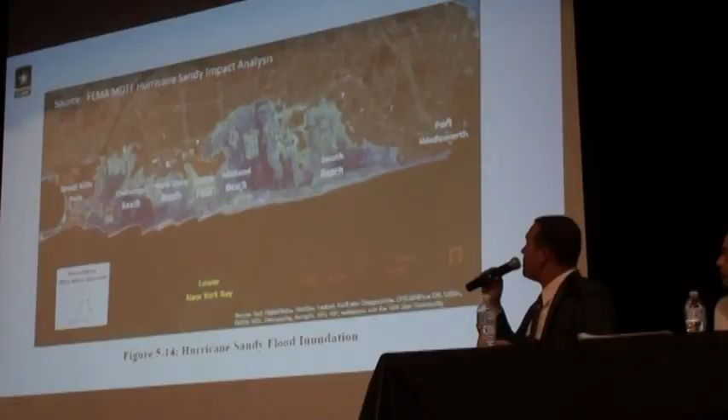Mr. Borough President. Thank you, Congressman. My name is Anthony Ciorra. I'm the Hurricane Sandy Recovery Program Manager for the Army Corps of Engineers New York District. And on behalf of our District Commander, Colonel Thomas Asbury, I would like to thank the Congressman and the Borough President. Again, that's the inundation map for this area from Hurricane Sandy.

You can see how widespread the flooding and damages were. So, talking about construction, all of the approvals that are necessary are in place. The Congressman mentioned the final hurdle that was enacted through legislation earlier this calendar year. The feasibility report was approved by the Secretary of the Army back in December 2016. I mentioned the federal cost share funds that are available under the Disaster Relief Appropriations Act, Public Law 113-2.

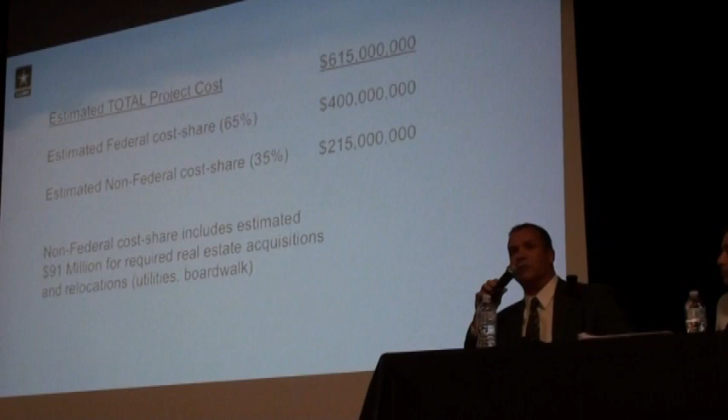The initial construction is cost shared, 35% with the non-federal partners at the state and city of New York. Those funds are also appropriated and in place. So all of the funding needed to build this $615 million project is available, and we are ready to proceed. We'll get to that. So, estimated total project cost, $615 million. Again, $400 million federal, $215 million non-federal, and that non-federal share includes $91 million in estimated real estate acquisitions, which the city will be performing in order to get the project constructed.

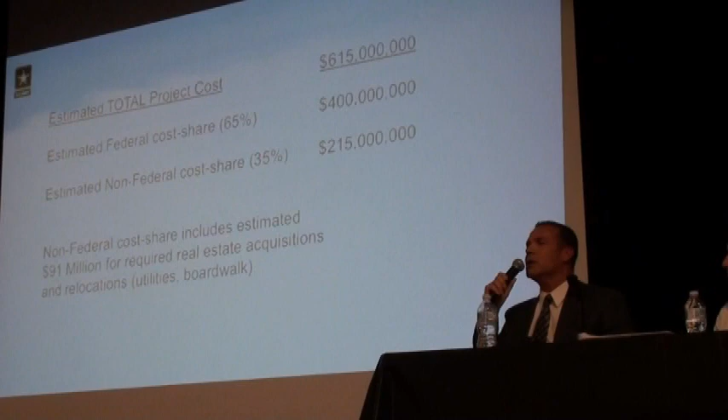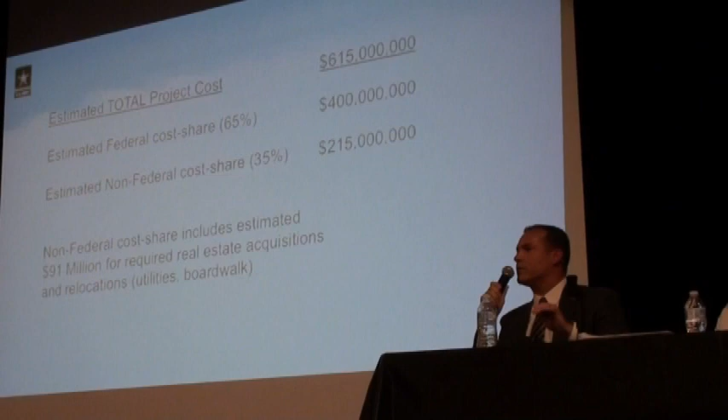There were times when we received no funding and had to stop work for a year or more and then pick it up again. I'm happy to announce that those days are behind us. We have all the funding needed to move to construction, and we're here today to tell you about what you can expect as far as the schedule, when we expect to start, and the best information we have available to you this evening. And with that, I'm going to turn it over to the project manager, Frank Verba.

All right, thank you. So what we'll do today is we'll kind of go through how we foresee breaking out the construction of the project. But just a kind of quick summary again. Once the report was approved in 2016, that allowed us to actually start the plans and specifications, the design phase for the project in 2017. And as Anthony said, we did sign the project partnership agreement, binding the project moving forward in February of this year between the Corps, the state, and the city of New York.

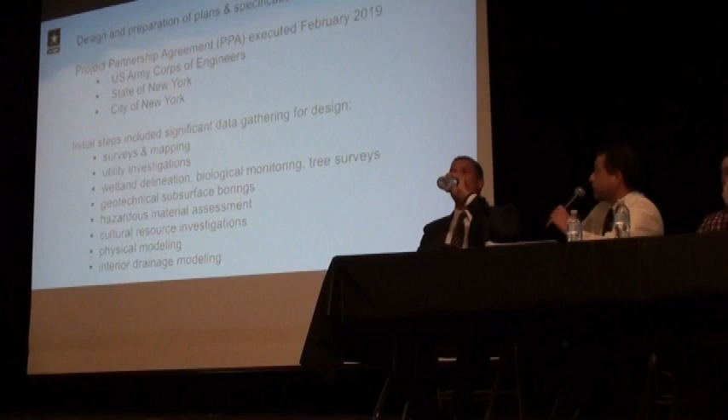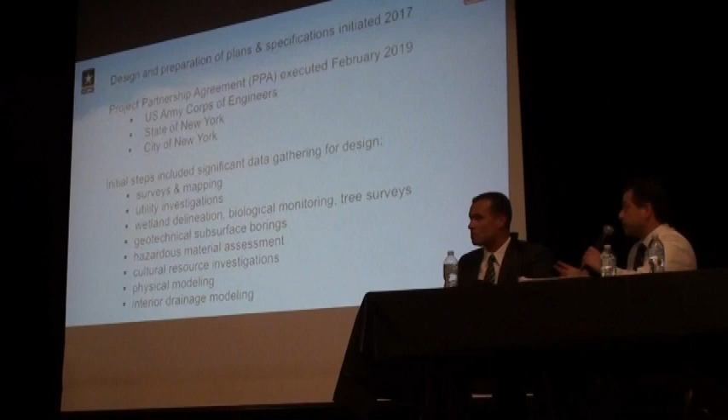Now, over these last 2 years, there's been a lot of work that's been going on behind the scenes, a lot of engineering and environmental work necessary to get the data that you need to actually get the construction contracts set up. And here's a listing of all the items that we've been doing: surveys and mapping, utility investigations, all the environmental wetland delineations, biological monitoring, tree surveys. We've been out in the field doing geotechnical subsurface borings, hazardous material assessments, as well as cultural resource investigations.

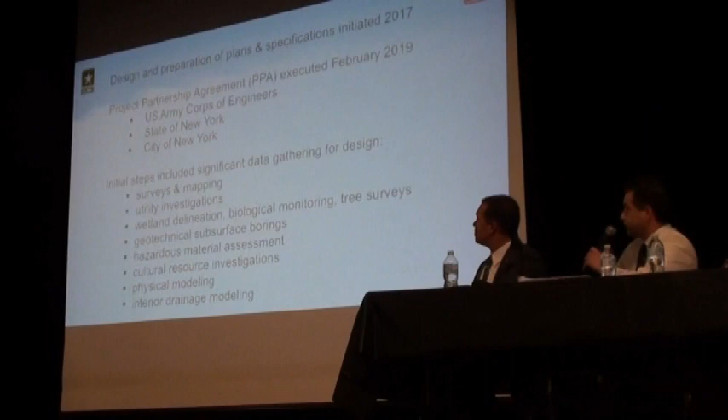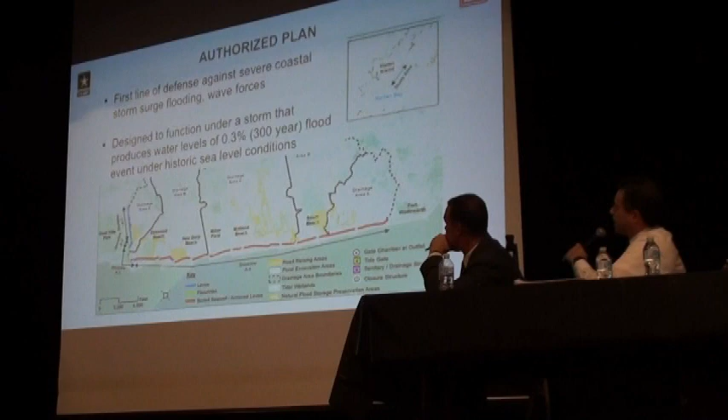Physical models were actually completed, trying to maximize the design, minimize the amount of overtopping, the amount of ocean water that can get over this project once it is constructed. All right, so obviously we do have an authorized plan, and the goal here is this is going to be your first line of defense against the severe coastal storm surge flooding event. It's basically designed at the heights that we're constructing to an approximate 300-year flood event, which actually is a little bit larger than what happened during Sandy. What is the height?

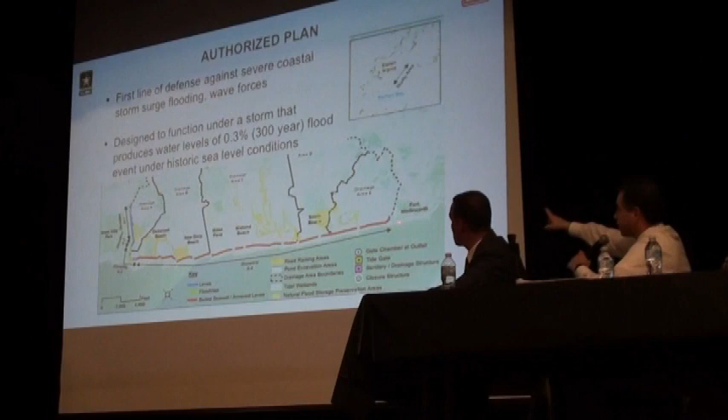We'll get to that. So, following the generic lineup of the project, you can see following the coastline from Fort Wadsworth, all the way through Miller Field, through New Dorp, all the way into Oakwood is going to be the buried seawall structure, large rock structure that'll basically give you that protection from the ocean.

At the Oakwood Beach treatment plant, we have a flood wall which will transition around the perimeter of that area, and then a levee structure which runs inland up towards Hylan Boulevard. That gives you that solid barrier against the ocean storm surge. On the interior, we have natural storage and excavated ponds. Those areas will be able to hold water during an event and basically be able to relieve water once the event is passed. So go to the next slide.

So while we're doing all this design effort, what we wanted to do, specifically on the interior areas, focusing on South Beach, New Creek, and Oakwood Beach, in the open areas where we're going to do natural storage and excavation for the ponding areas, we are starting a site preparation activity for Phragmites control. Some people may be familiar with this because the city has been doing this in some of these areas as well. The objective here is to basically cut down, start mowing those large Phragmites weeds that grow out there.

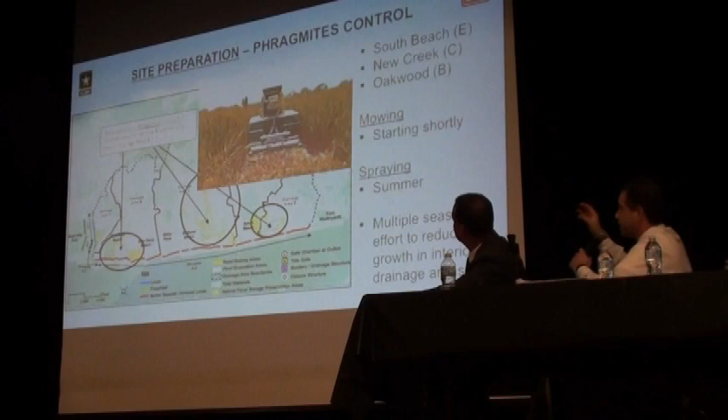With spraying in the summer, there'll be multiple seasons, and the objective here is to start getting that growth out of the way so that when the construction events actually start happening, it'll be a lot clearer to complete the construction. The new plantings that we'll be putting into the area will have a better chance of survival. So this is going to be the first field work that everybody sees. We expect to start in the next couple of weeks in December. Obviously the weather will have a play on this, but the goal again will be through South Beach, New Creek, Oakwood, getting rid of all that Phragmites, multiple seasons.

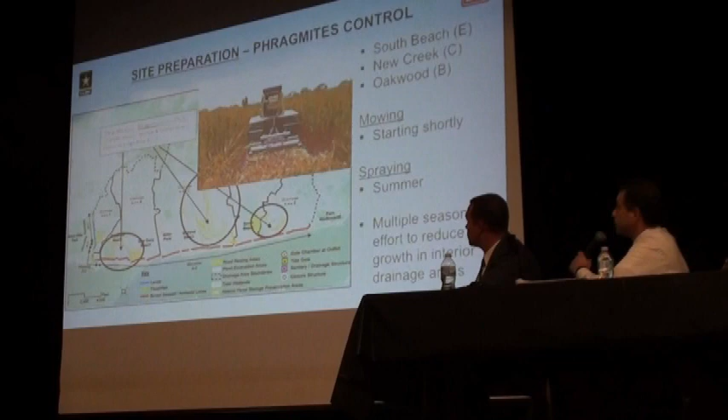Next slide. So now we'll go through how we're going to break out the actual construction of the project. A project this size cannot be constructed all at once. It has to be broken out into different construction contracts. And the objective is we tried to set this up so that individual contracts would have space for contractors' actual work, while other contractors would have room on their portion of the project as well. So first contract, if you go to South Beach, this is what we call Interior Drainage Area E. That should be the first contract for the project, and we're looking to start late next year in 2020. Next slide.

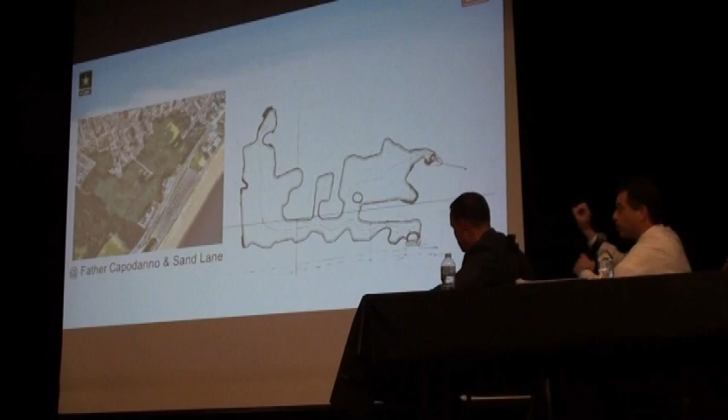So the area that it bounds is, I think people are familiar, Father Capodanno and the Sand Lane area, that open plot of property. The objective here is to basically create a ponding open storage area for interior drainage. Next slide. Here you can see schematically what the area will look like. We'll take that open space, create that new grading to hold the storage. It'll be an excavated pond, roughly 30 plus acres. You'll be excavating about 100,000 cubic yards.

The goal here is this ponding area will be dry on a regular basis. It'll basically be able to hold water during large stormwater events. Once those events pass, that water will drain out. So more often than not, this will be a dry area. The ponding will include two drainage structures that'll tie into the existing Sand Lane outfall, which already gets water out from the interior into the ocean. There'll also be another connection into the Quintard Street outfall.

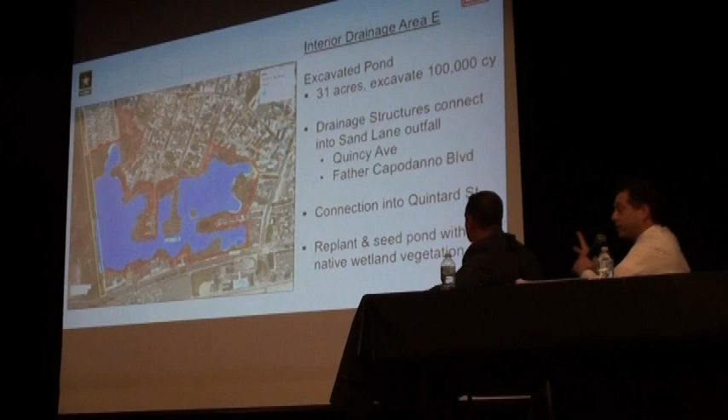Once we have the excavated pond, the entire area is going to be replanted and reseeded with native wetland vegetation. And that goes back to what we're trying to do: get rid of the Phragmites, get the excavation going, and then replant with new wetland vegetation. The next slide gives you a close-up of where the interior inlets are going to be for the drainage structure, one running down under Quincy to tie into Sand Lane, and one running under Father Capodanno, same thing, connecting into Sand Lane. So that was the first contract, late 2020, Interior Drainage Area E in South Beach, that natural storage.

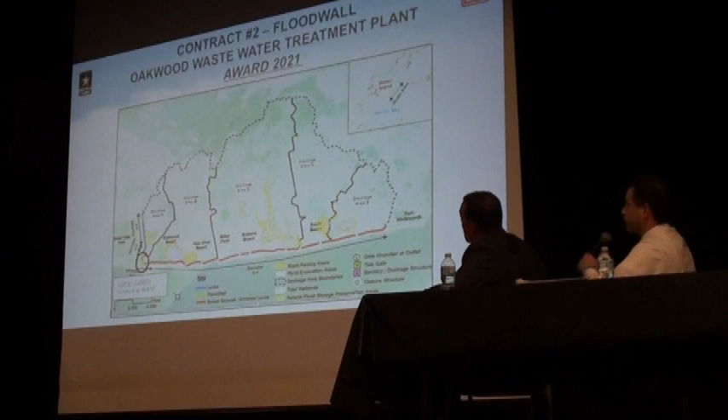Contract 2, if you swing all the way out to Oakwood Beach at the wastewater treatment plant. This is a contract that we're looking to award in 2021. Next slide. So this is where the structure has to basically run the perimeter of the already existing treatment plant. The plan here is to use a concrete flood wall section for this. Next slide. It's about 1,800 feet. It'll basically go around the perimeter of the treatment plant.

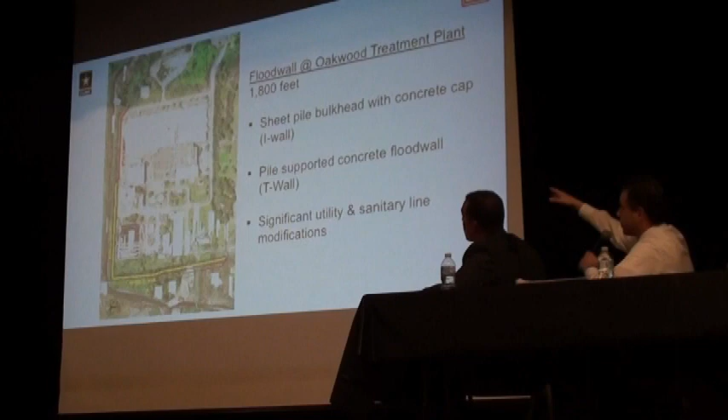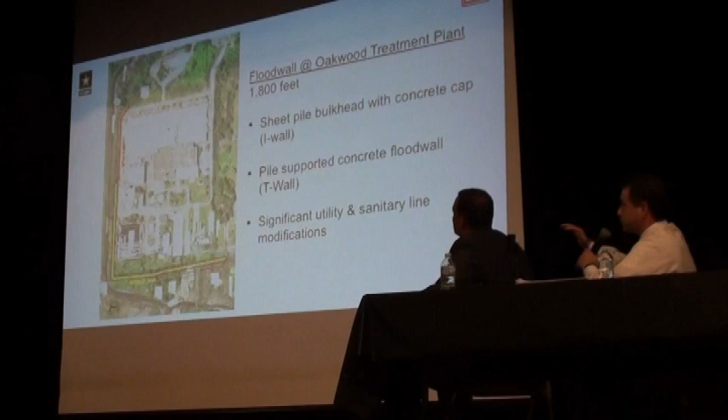It's mostly a pile-supported concrete flood wall that'll run the coastline and up the creek area. And then as you reach the more northern part, it'll be a sheet pile bulkhead with concrete cap. Important to note here is obviously you're at the treatment plant. There's significant utility and sanitary lines that run in the area. So a lot of our effort right now is making sure we understand where all these pipes are, because they all have to be accounted for in the project.

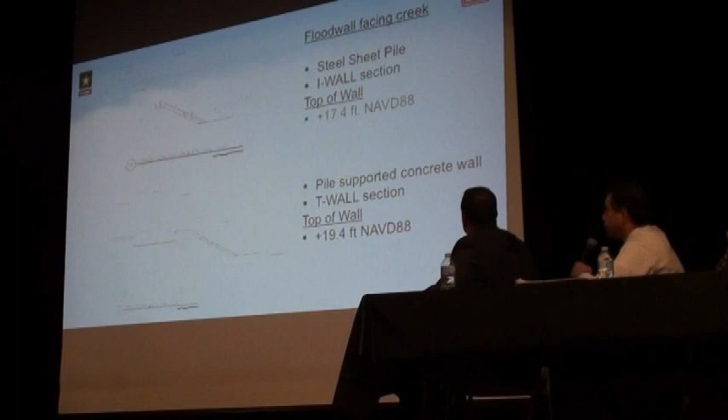Next slide. All right, again, just generic schematics of what the flood wall would look like. There are sections of the flood wall which will be facing the creek. Again, one section is a steel sheet pile, elevation plus 17.4 NAVD 88. Roughly, this wall will range. The terrain in this area is up and down, so you could get heights of 12 feet. You can get heights where it already runs very close to the ground. It just depends on where you are.

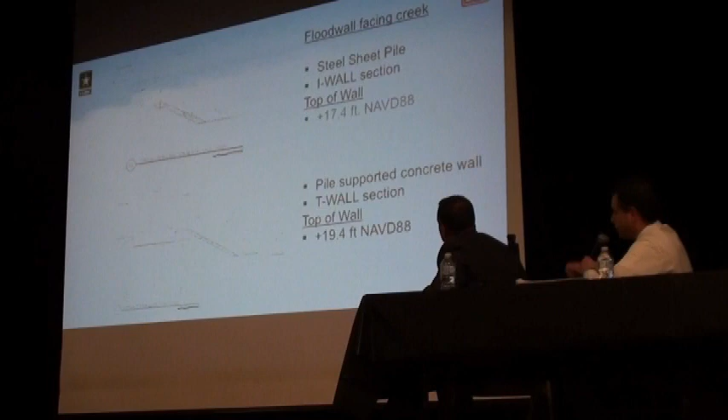As you move closer towards the ocean, you get the pile-supported concrete wall, and you can see the elevation jumps to plus 19.4. Next slide. And then facing the ocean, you get the same structure, the pile-supported concrete wall at elevation 19.4. Again, roughly in this area, on average, it's going to look like a 10 to 12 foot structure.

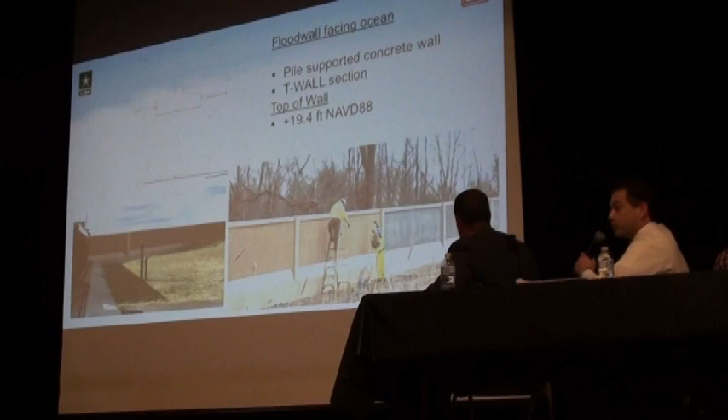Some of these pictures below, you can see these are actual photos from another project. This is the Port Monmouth, New Jersey project flood wall. I kind of chose these because it does give you a feel for what the structure will look like. It also shows that you can provide texture to the wall to make it a little more aesthetic. You can pick colors that can blend into the area a lot better. So it gives you a good example of what this flood wall will look like. But again, this will be just the structure strictly around the boundary of the treatment plant.

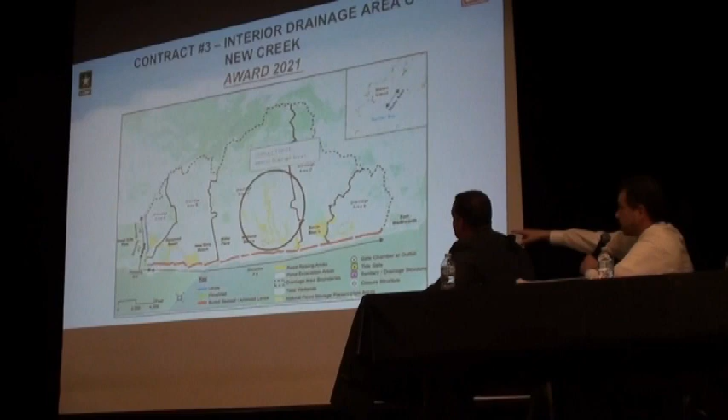All right, so we started in South Beach with the interior ponding. We went to Oakwood Beach with the flood wall around the treatment plant. Now you move back to the middle into the New Creek area. Again, this is another contract that we're looking to award in 2021. Next slide. All right, this is the New Creek area. I think people should be familiar with this. This, again, is open space. We're looking to create ponding and storage in this area. This is basically the area that runs from Hylan Boulevard all the way down to Father Capodanno.

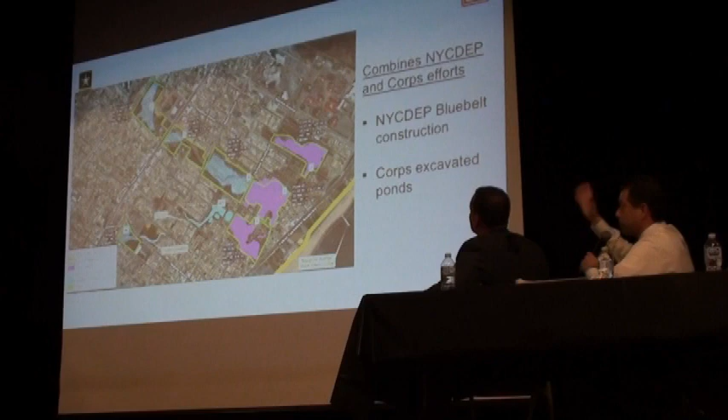Now, this is an interesting case because we actually have multiple efforts going on at the same time. The City of New York is currently in construction and has plans to continue construction for the Bluebelt portions of the project. So what we've done here is we've coordinated with the city. They will continue their portions of the construction, and we will take care of the remaining ponds. At the end of the day, we'll all meet and basically all ponds will be used for the project. So if you go to the next slide.

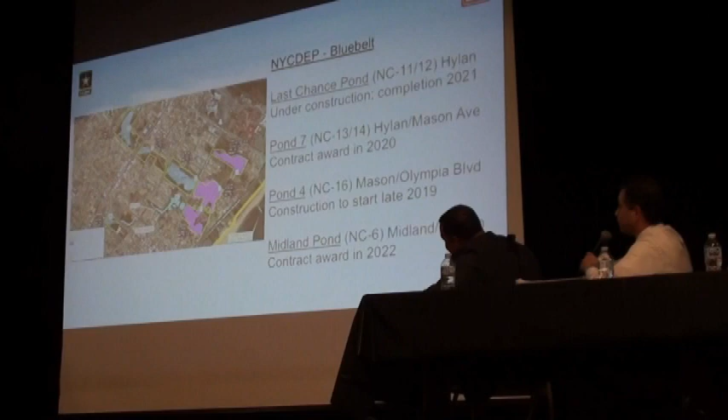For the city's portion of the Bluebelt, it's the top portions that you see in the gray. Last Chance Pond, that's already under construction, and I know they're aiming for completion in 2021. Moving down, Pond 7, between Hylan and Mason, that contract is going to come online in 2020. Pond 4, Mason and Olympia Boulevard, they're actually expecting to start construction by the end of this year. And then Midland Pond, the area of Midland and Lincoln, that would come online in 2022. So again, the city will continue with their efforts and continue to drive those portions of the ponds towards construction.

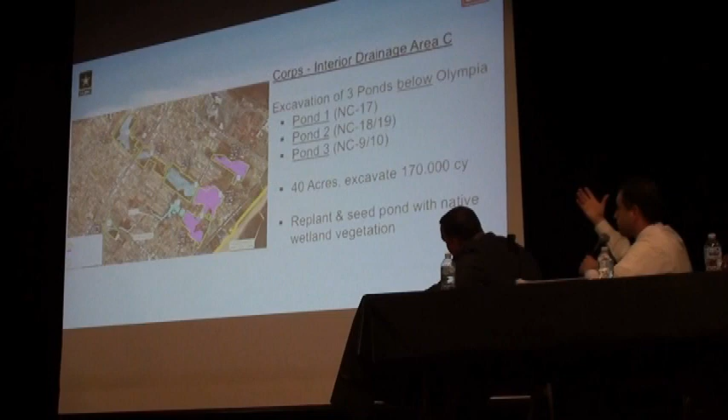Next slide. The bottom three in pink, those are all the ponds that are below Olympia Boulevard, will be the ones that the Corps will construct. We call them ponds 1, 2, 3. Again, a rough approximation, they're about 40 acres. We'll be excavating about 170,000 cubic yards. Same concept as Area E: dry on a regular basis, but able to store water during high-level events. This will be an area where we're trying to get rid of the Phragmites growth, and once we get the excavation completed, we'll be replanting and reseeding with native wetland vegetation.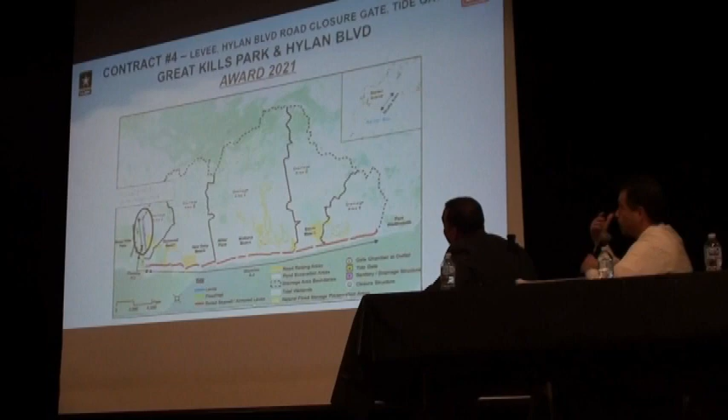But this fourth contract, now basically from the top of the wastewater treatment plant, where the flood wall contract ended, we'll begin the levee structure that will run parallel to Great Kills Park and run up into Hylan Boulevard. And there'll be a road closure gate on Hylan Boulevard as well as a tide gate. And we'll see some of the details here.

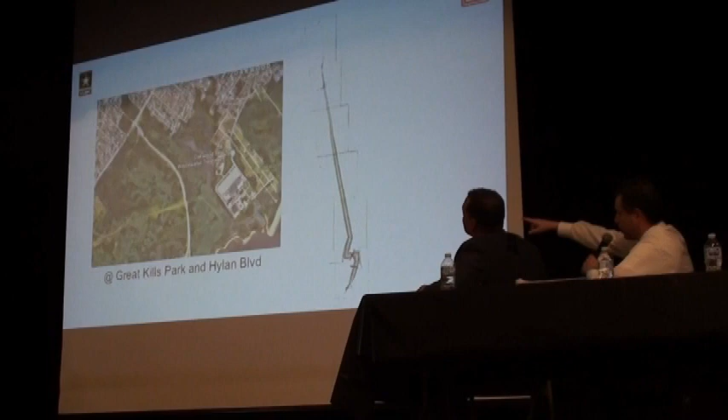All right, so basically that's the aerial, and like we talked about, the flood wall will go around the perimeter of the treatment plant. From that point on, we will construct a levee that'll work its way up, basically following the edge of the Great Kills Park. Let's go to the next slide. All right, this is just kind of turned over, you get the feel.

You see the green is where at the treatment plant the flood wall would end. The levee structure then starts at that point. It's in the blue. Levee structure is basically earthen levee, compacted. That structure will have to cross the existing creek. A tide gate will be constructed there. Behind that tide gate, that open area, which we call interior drainage area A, this is a little different. This area will not be excavated. It'll just stay as open space.

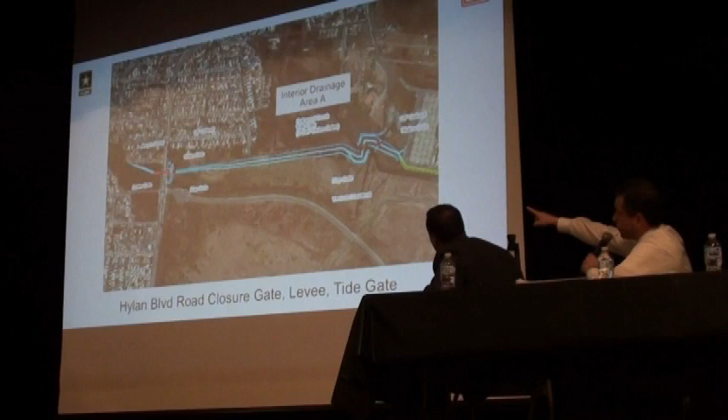Then the levee continues all the way towards Hylan Boulevard. Now to tie off into high ground, you need to get across Hylan Boulevard, so that's why we have come up with the roller gate that will need to be installed on Hylan. If you go to the next slide.

All right, so just quick summary. Again, levee from Hylan Boulevard down to the treatment plant. It's about 3,400 feet, earthen levee. It ties into the flood wall contract. It will have an access ramp so you'll be able to do operation and maintenance. You'll be able to access that and get down to the tide gate and the other structures that are on it. The tide gate is on Oakwood Creek.

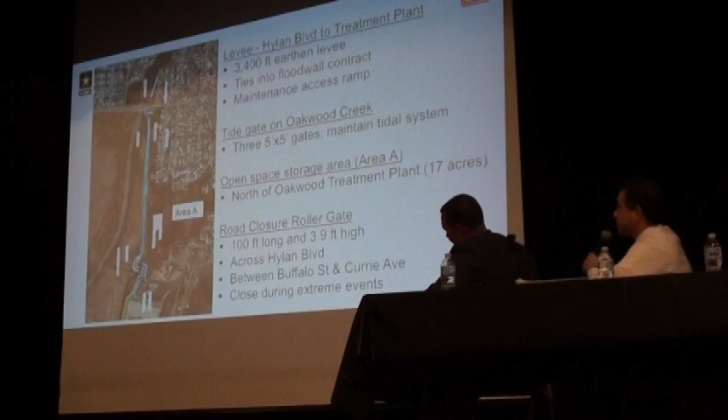And again, the objective there is to just maintain the existing tidal system. So again, it'll be open on a regular basis. During events, it would close and basically act as that barrier. We talked about the open storage that's behind it. It's just going to be open space. It's about 17 acres. And then the roller closure gate.

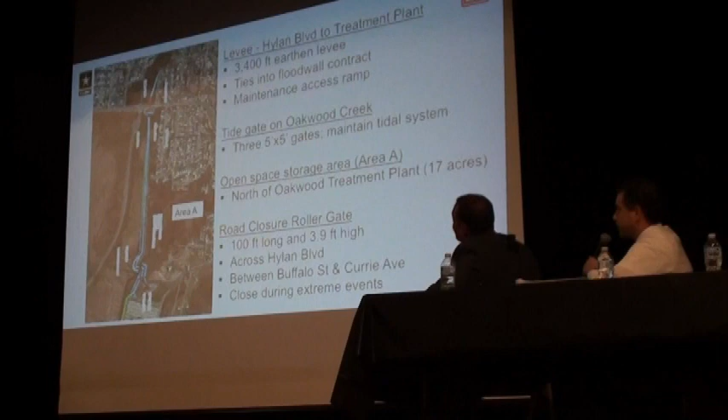Again, you need to cross Hylan Boulevard to basically get to the high ground on the other side. So the construction will consist of a 100-foot long roller gate structure. It will appear about 4 foot high when you're standing on the street. It will cross Hylan Boulevard, basically between Buffalo Street and Currie Avenue.

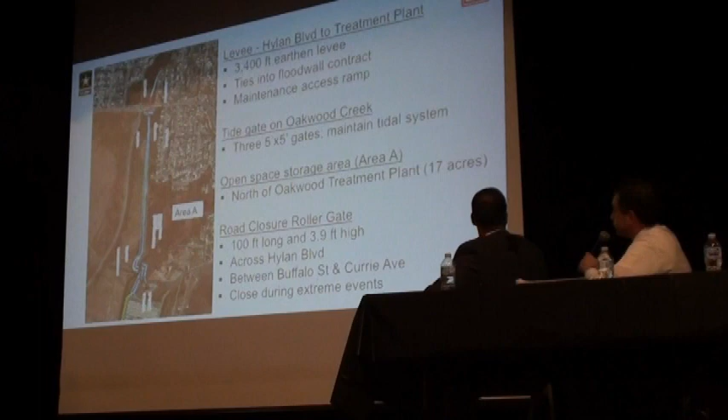It'll always be an open gate. Only during large storm events would it need to be closed. And it needs to be closed because obviously that is where water could flank the project, so that area is vulnerable. If you go to the next slide. Correct. And then the levee ties into high ground on the other portion of Hylan. So if you go to the next slide.

So the levee on our end will be a little bit different. It will have a top, like we said, so that maintenance vehicles can get onto it. But basically, it will look like that, with that style of the grass and the mound structure. Next slide. We talked about the roller gate.

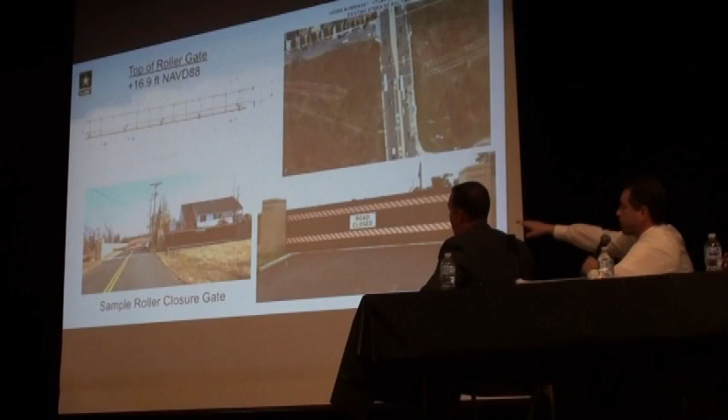Again, it will have to cross and be closed on Hylan Boulevard only during large-scale events. Some of the photos on the bottom are actual roller gates from a different project. These are from Port Monmouth as well. You can see how the roller gate sits in its housing on a regular basis. Only during events would it be closed.

Okay, so summarizing again, South Beach, interior drainage, New Creek, interior drainage ponding, the flood wall around the treatment plant, the levee structure that runs up towards Hylan Boulevard and includes the tide gate and the roller gate.

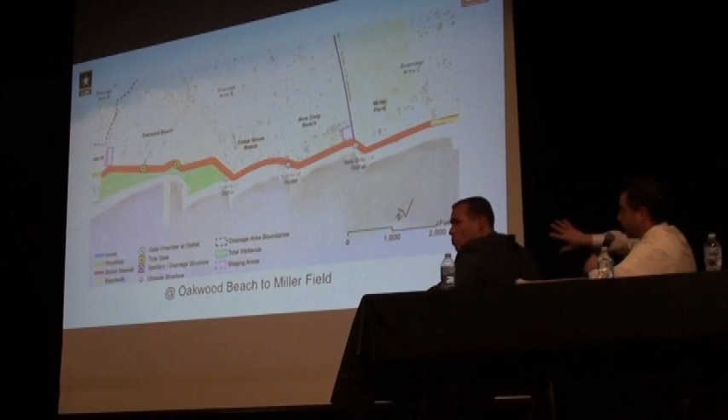All right, so this structure, like we said, this is a cleaner view, runs the length of that through Miller Field. Some other portions of this project: there are existing outfalls, the New Dorp outfall, for example, that already exist in the project area. Those will have constructed chamber gates. Basically, the idea here is that during an event, the seawall will provide that barrier against the ocean, but those outfalls are openings, so during events, those outfalls will be closed. Again, same concept as a tide gate, blocking that water from coming in, and after the event passes, everything opens back up and is able to drain out naturally.

Also along the line of protection, you can see in the open section, near the Kissam Avenue area, that's where the creek again comes into the interior drainage. There'll be two tide gate structures that will be constructed, and the objective there is to allow water to get out.

All right, so we kind of touched really quickly, but this contract from Oakwood to Miller Field includes the buried seawall, and on top of the buried seawall is going to be a promenade section. Basically, the top of the structure will have a 17-foot concrete walkway that can be used for access and other purposes. The two tide gates on the creek, all the stormwater outfall gates will be installed. There will be an excavated pond, what we call interior drainage Area B, as well as other open space storage areas, and we'll look at the map there. We talked about the tidal wetlands that will be constructed.

Once we get into Miller Field, there will be some cultural mitigation that's going to be required. The fire tower we'll touch on very shortly, and there is the memorial that will need to be relocated. And just a note, the existing tide gate that's already in Oakwood Beach, that was a previous project constructed by the Corps of Engineers, that'll be removed because it'll be replaced by the larger scale project.

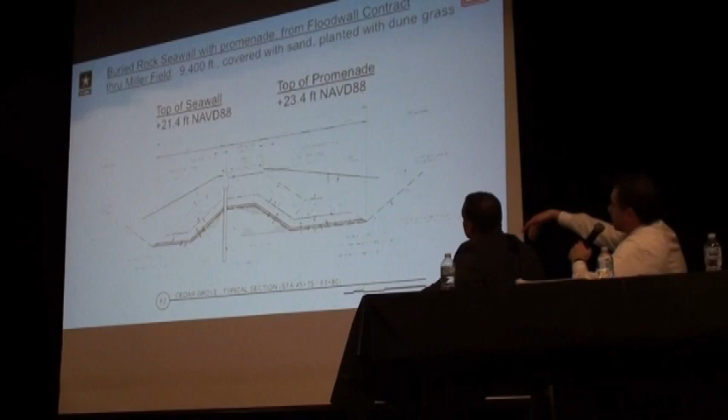All right, buried seawall, it's a typical cross section, again with a 17-foot promenade on top, rock structure, basically running from the flood wall contract in Oakwood Beach, and it'll run continuously all the way through, like we said, along the shoreline up through Miller Field. Now some of the heights here, because you are fronting the ocean, we're up to plus 21.4 foot for the top of the seawall, and when you get to the promenade, you need a couple of feet on top of that at 23.4. So again, in certain areas, it could be a 12-foot structure when you're standing in front of it.

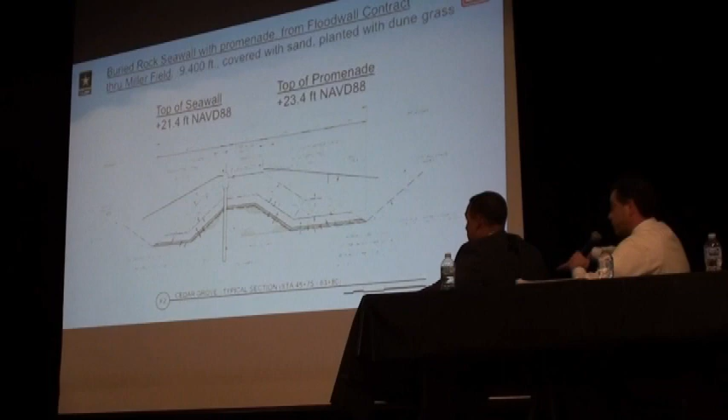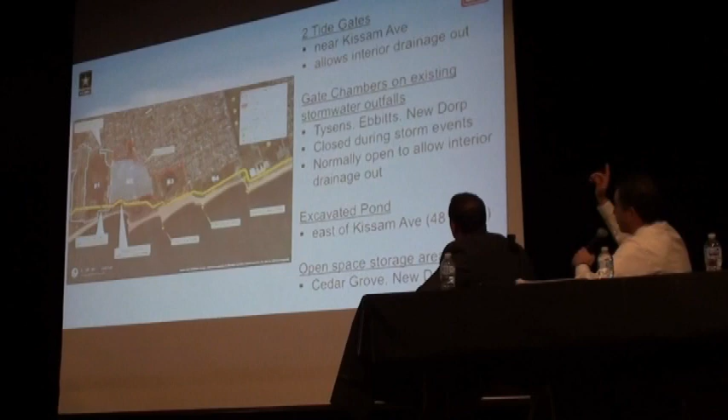All right, reminder, the two tide gates right near Kissam Avenue, because that is where the creek naturally flows in that area, but those tide gates are basically to allow the interior areas to let water out. Because you can see what's happening here, we're creating that barrier against the ocean, but the interior, you want to be able to store water and then eventually let it out.

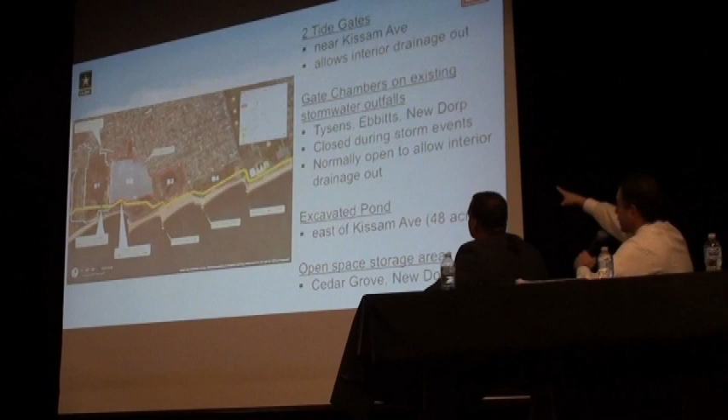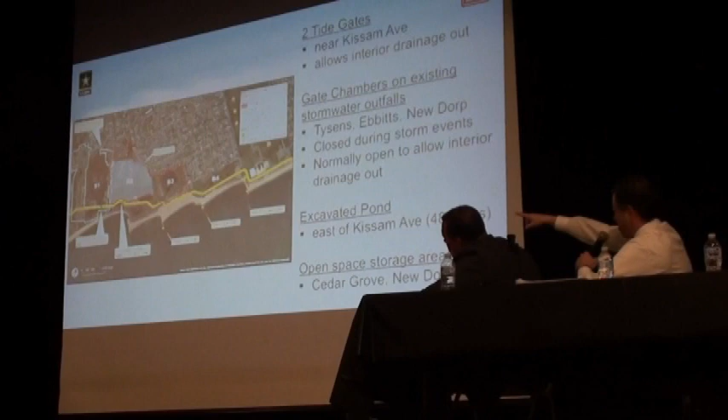The gate chambers on the existing stormwater outfalls, Tysens, Ebbitts, New Dorp, again, those will only close during storm events to create that blockage, but they'll be open on a regular basis to allow all the interior drainage to come out. There will be an excavated pond east of Kissam Avenue. That's that section B2. It's about 48 acres, and we'll go into a little more detail. But there are open space storage areas in Cedar Grove and New Dorp. You can see them there in B3, B4. That open space, again, it won't be excavated, but it needs to stay open to allow for more storage.

All right, this is interior drainage area B. This is the pond that we're going to create right to the east of Kissam Avenue. It's pretty large scale. It's approaching 50 acres, about 125,000 cubic yards. Same concept as the ones in New Creek, same concept as the one in South Beach. Basically dry on a pretty regular basis, replanted and seeded with native wetland vegetation.

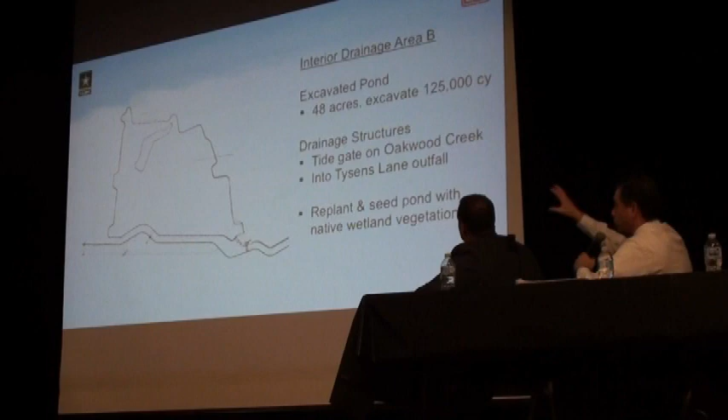The idea is basically, it's there when you need water to be stored, and then eventually it can get out. It will get out through the tide gates on the Oakwood Creek, and there'll also be a connection into the Tysens Lane existing outfall.

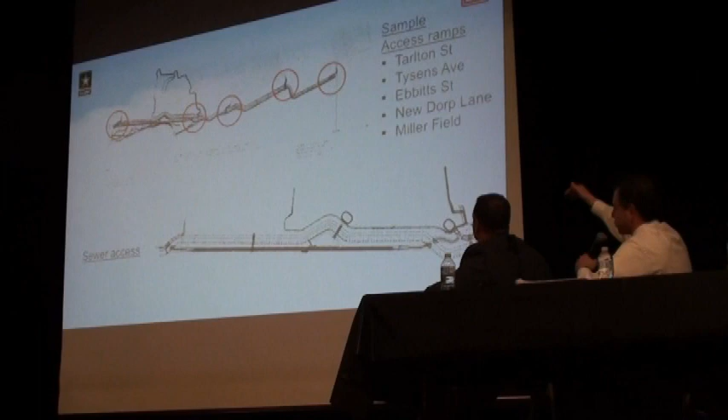Also important to note is down by the treatment plant, there is a main sanitary line, so that needs to be accessed at all times. So we'll be constructing a sewer access roadway for the city DEP that you'll be able to basically come off the structure and get onto, so that they could always have their maintenance completed.

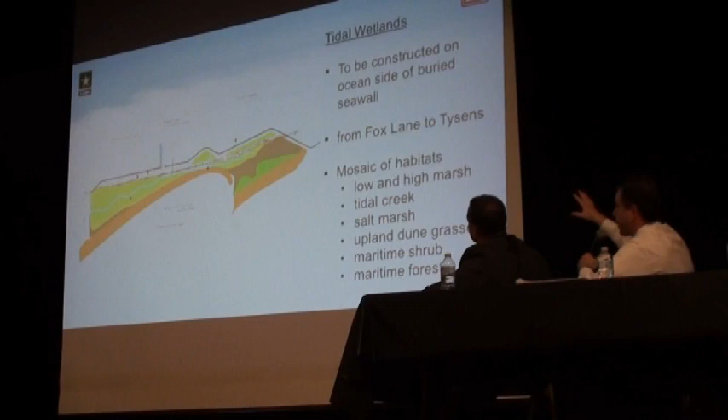Now the tidal wetlands, this is a special feature in the Oakwood Reach. This is to be constructed on the ocean side of the buried seawall. It'll run from Fox Lane, right at the treatment plant, to Tysens Lane, and it's basically a mix of habitats to upgrade the area: low and high marsh, tidal creeks, salt marsh, upland dune grasses, and then maritime shrubs and forests. The objective there is to environmentally enhance the area, but it also does help offset some of the wave impacts that could occur in this area during a large storm.

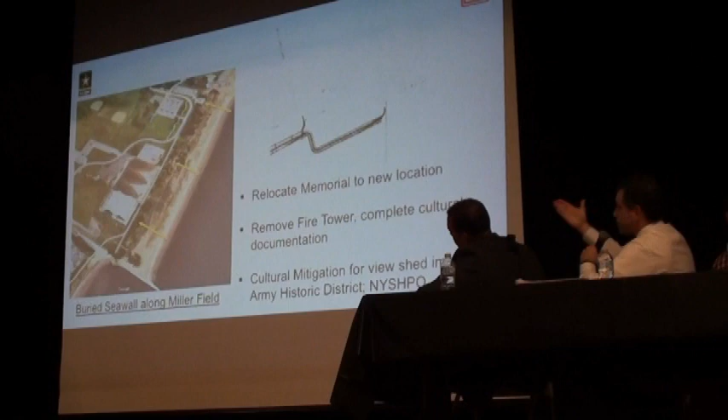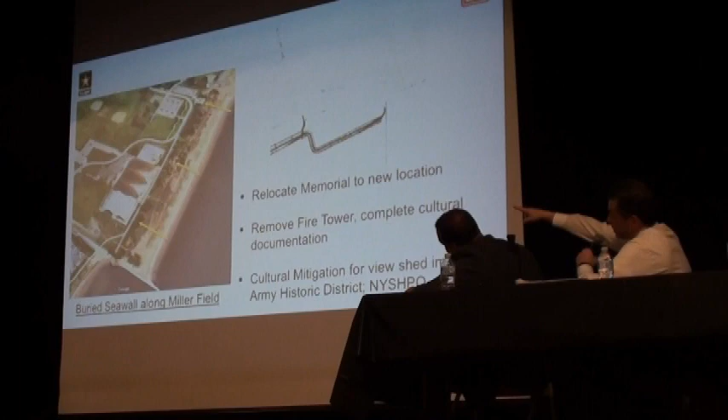All right, so the structure, remember, runs from Oakwood Beach all the way into Miller Field. Now, once we enter Miller Field, a couple items to note. The memorial that exists right near the Father Capodanno area needs to be relocated, and we're in coordination right now with the city and National Park Service for a new location. The existing fire tower that is right in the middle section, that second yellow arrow you see there, is also in line with where the structure has to go, so that fire tower has to be removed.

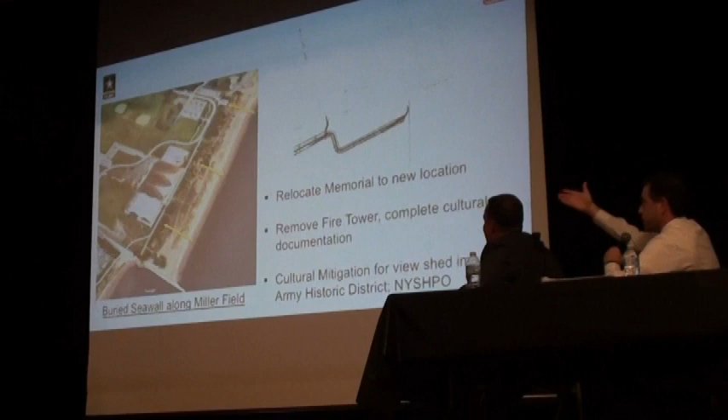We will complete a full cultural documentation to preserve its history and the importance that it had during its time. And then in general, there will be cultural mitigation for the viewshed impacts, for the usage of this area that it once was. We know that we have to do some mitigation. We are in coordination with National Park Service and the New York State Historic Preservation Office, and we're working on how to do that effort. But that is also part of the project.

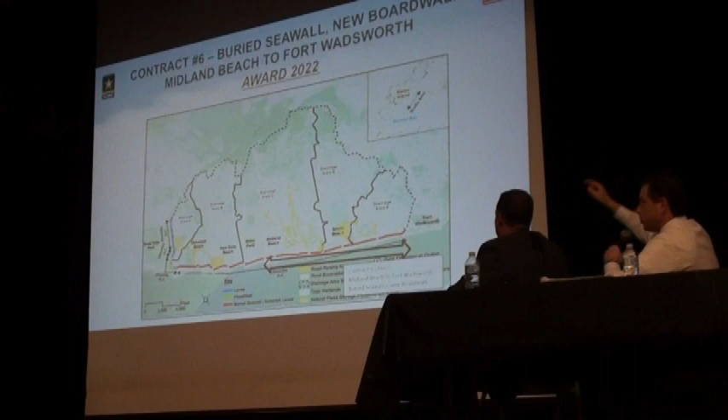All right, now we move to contract 6. Just a quick summary again: South Beach, interior ponding; New Creek, interior ponding; the flood wall around the treatment plant; the levee structure and the roller gate up to Hylan Boulevard. We just talked about the buried seawall from Oakwood all the way through Miller Field, which has the 17-foot promenade, and the tidal wetlands fronting a big portion of it.

Now this is the section from the edge of Miller Field up to the edge of Fort Wadsworth. This is the portion of the project that runs basically where your existing boardwalk is today, and the existing promenade reach. This is a contract that's coming in 2022. Next. All right, so buried rock seawall, same structure that you're going to get from Oakwood to Miller Field, except on this portion, instead of the 17-foot promenade section, you will get a new boardwalk, 38-foot wide, new access ramps, new stairs to get up and over, just as you do today.

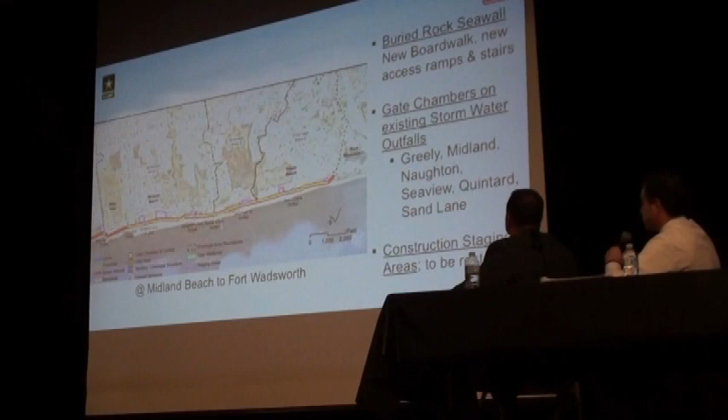And the new thing here is that boardwalk will now run the entire length from the edge of Miller Field all the way to Fort Wadsworth area. Just like in the other reach, the existing outfalls at Greely, Midland, Naughton, Seaview, Quintard, Sand Lane, same concept. Gate chambers will be installed on those to stop water from coming in during a large event, and will be open on a regular basis.

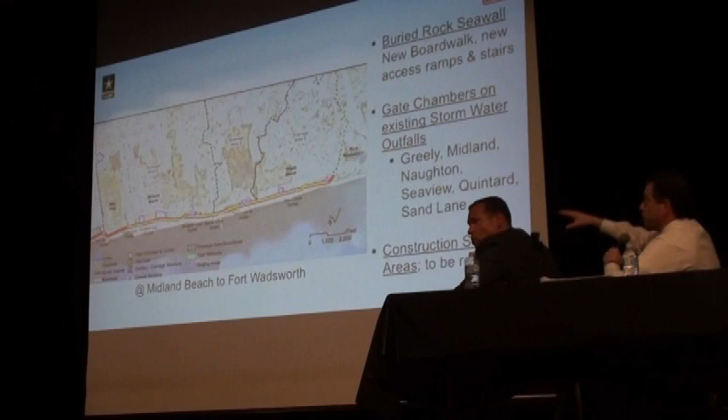The other thing important to note, project this size with the amount of stone and construction that's going on, there's a lot of staging areas that are necessary for the contractor to build the project. So we're working again with the city and the state to identify locations that can be used for the duration of the project. That may very well be some of the older parking lots or some open spaces that we can use, allow the contractor to build a project. All areas that we use during construction will always be restored to existing or better conditions than when we first started.

All right, now for the boardwalk section here from Midland Beach to Fort Wadsworth, same heights as before, 21.4 for the top of the seawall, top of the boardwalk, 23.4. As a rough approximation here, if you're standing on the boardwalk today, the new boardwalk will be about 6 feet higher than what you stand on today, to give you a sense of scale.

All right, now we've been focused on all the other contracts at this point. This is the one that we're starting to really get into now. So that's the design features of the new boardwalk, the new access locations, including ramps and stairs. That's still a work in progress. We know that there are a lot of existing park facilities that are in the area that run along the boardwalk, and we know we need to integrate the new project with that, so we're working that as we speak.

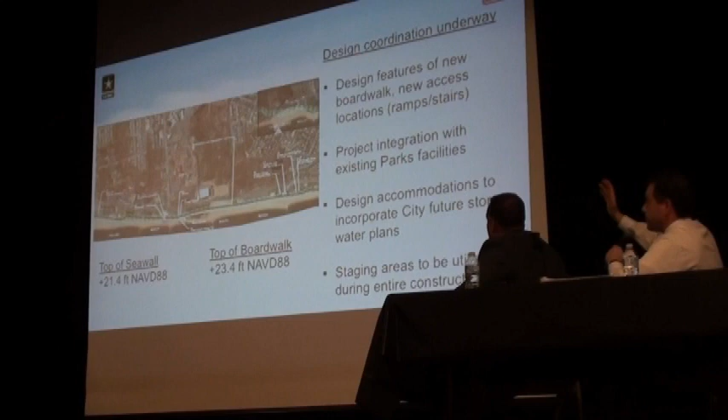Another interesting item, the city does have future stormwater plans for this area, and we're working with the city to do design accommodations. Not that they would build them now, but that once our project is built, they can easily connect and continue to upgrade the interior stormwater efforts within this area. So we're working that out. And like we said, the staging areas that need to be utilized during entire construction, we're working with the state and the city to really pick the locations that we'll use during construction.

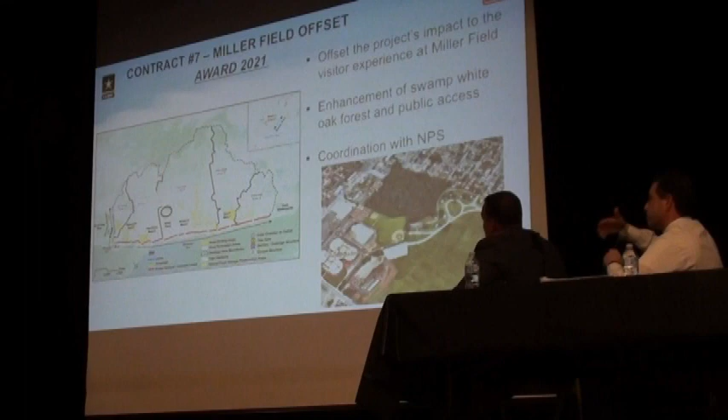All right, last one, contract 7. Sorry about that. This is a contract that will come in 2021. This is what we call the Miller Field offset. Again, this does not provide any storm enhancement. Basically, this is to offset the project's impacts to the visitor experience at Miller Field, basically to allow the structure to be built along Miller Field.

There is a little bit of a trade-off, so what we will do is create an enhancement of the existing oak forest that's basically in the north right corner of Miller Field next to New Dorp High School. We'll upgrade that, we'll increase the public access to that area, and we're in full coordination with National Park Service to get that contract done.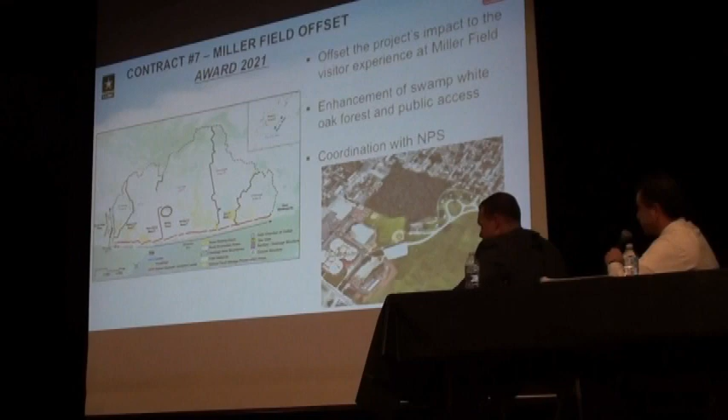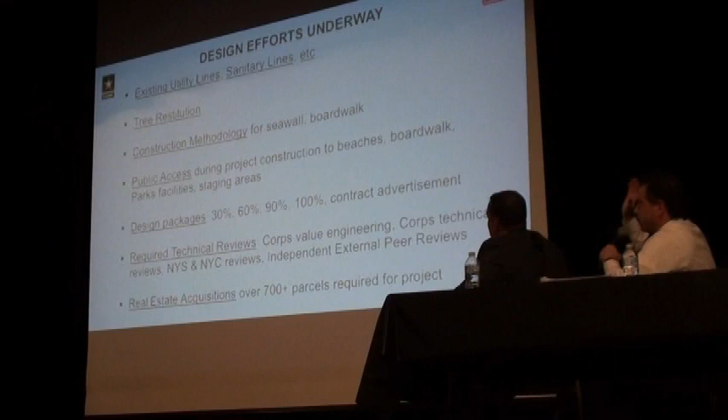All right, so we kind of broke down all the different contracts, but just to give you a feel of what still needs to be done, we talked about this earlier, the existing utilities, sanitary lines, I mean, there are a ton of lines in this area, and we're working with the city, with DEP, because we need to know where everything is, and that work continues. Obviously, the project is big and this long. There'll be trees that'll have to be removed, so we're working with city parks for tree restitution. Obviously, that'll be part of the project.

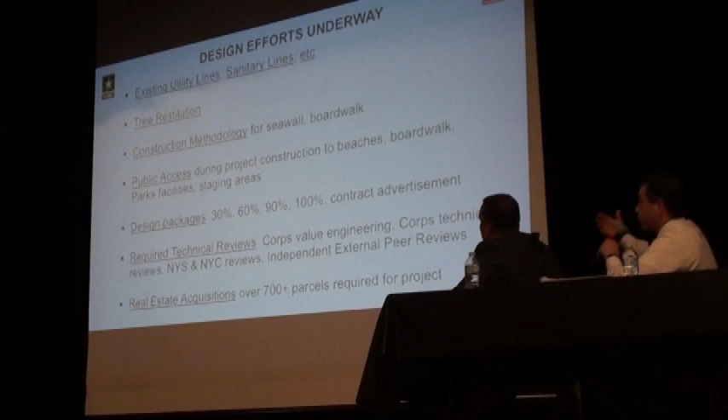Construction methodology for the seawall and boardwalk. We still are at the early stages. We don't have an answer just yet about how we foresee constructing that portion of the boardwalk, which entails removal of the existing boardwalk. That's still a work in effort. Again, what we're doing right now is focusing on the design, and then we'll work towards what's the best way to construct this to minimize the impacts to the area and build it as fast as possible.

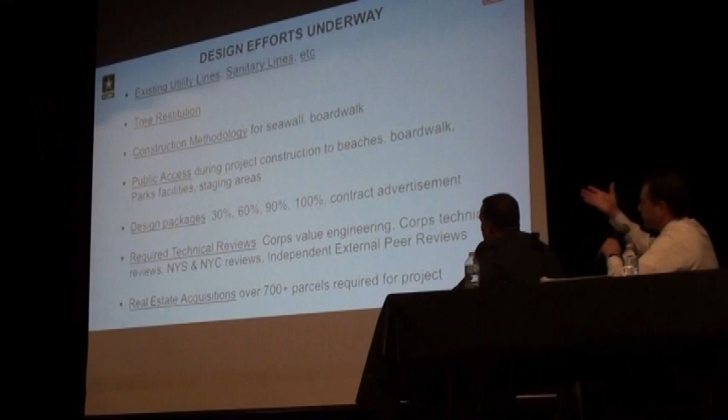Public access, that's another thing that we're starting to talk about here. Obviously, once the project is under construction, there is an impact to accessing beaches, the boardwalk, the existing boardwalk, park facilities, staging areas. Again, we're all in discussion right now with the city and state to try to organize this so that we try to minimize as much as possible. Just to give you a feel, design packages that we need to do, we go from the 30% design to the 60, to the 90, to the 100, and ultimately the contract advertisement.

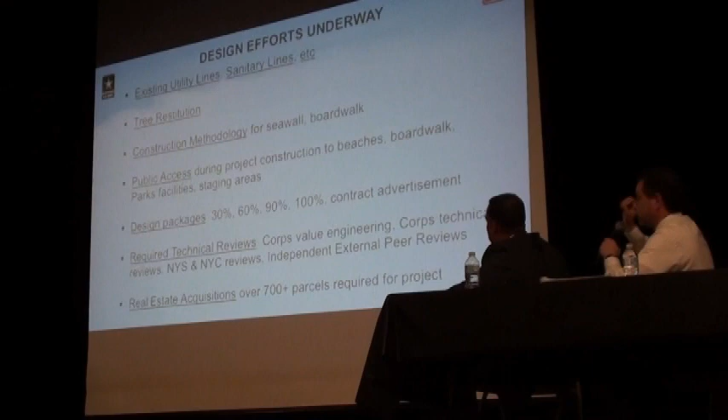So there is a lot of effort that goes into all these design pieces. Also, there's a lot of reviews that are required to continue and get to the construction contract. There is value engineering that we do on all of our contracts, trying to maximize savings, find a better way to do construction. There's technical reviews that are required. We have our sponsors, the state and the city, who also provide their review comments. And we actually go to an independent external peer review, where an outside entity looks at our plans, gives us comments. Again, all in the objective of making a better package for construction.

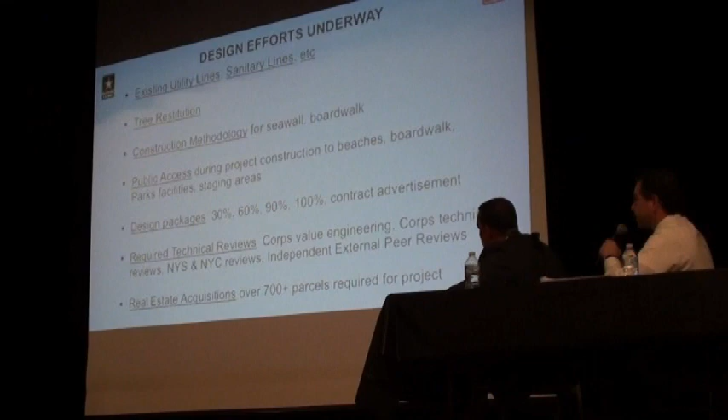And then all this project needs to be built, but to be built, you have to acquire a lot of real estate here, and the city is currently making great progress in that. There are over 700 parcels that are required for this project, and I know the city will give an update on that, but that is a necessary piece, and it has taken some time to get to all those real estate acquisitions.

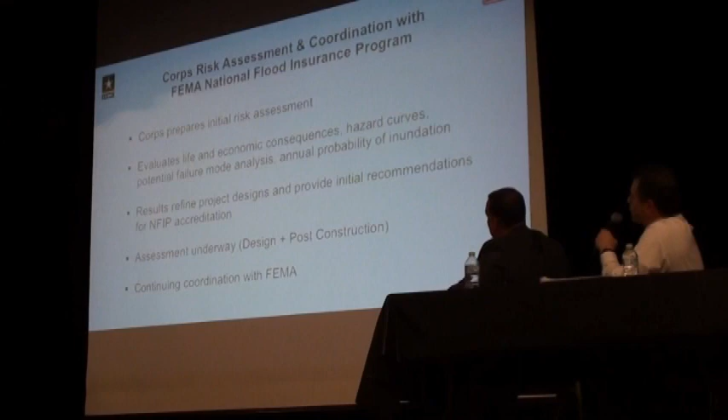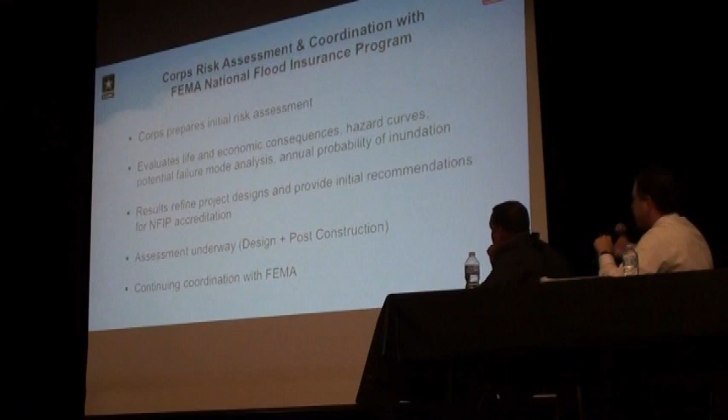Okay, so mentioned earlier on was the FEMA National Flood Insurance Program. The Corps is coordinating with FEMA on how to proceed here. First steps on our end is that we do need to do an initial risk assessment, and that does evaluate life and economic consequences, hazard curves, failure probabilities, inundation probabilities. The way our rules are, we have to do a certain analysis to make sure that we, the Corps, can certify that the structure can handle the large-scale events. Those results then get shared with FEMA.

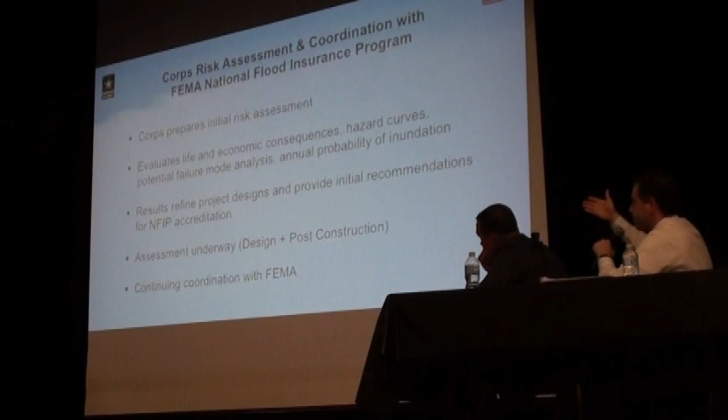As a little reminder here, the assessments that we do start in the design phase. They also go through post-construction, but we are in continuing coordination with FEMA. So, like I said, this will advance as we advance our plans and our designs. And once we get closer towards the start of construction, you'll hear a lot more from FEMA as to how we're going to proceed there.

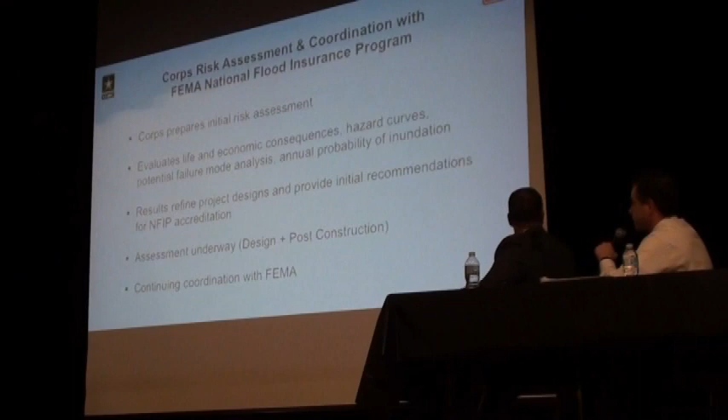All right, the other thing that's important to note for this large-scale project, as big as it is, all the structures, the road closure gate, the levee, the flood wall, the tide gates, the buried seawall, they're all currently being designed for potential future sea level rise adaptability. So we're not going to build them to those new heights today, but they'll all be built to be set up so that one day in the future, the entire structure line can be raised by an additional 3 feet if sea level rise really starts to become a concern. So that's another positive here that we'll account for right away.

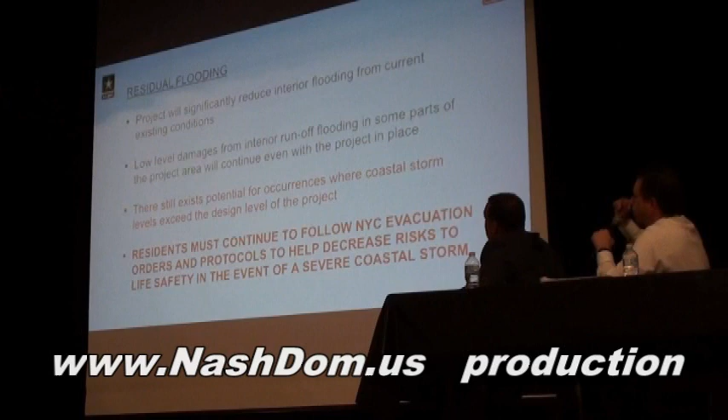All right, now what's important to always understand when we build projects: obviously once the project's in place, it's going to significantly reduce the interior flooding from a storm such as Sandy. But once the project is there, there are always going to be low-lying areas in the interior that just have standard runoff flooding in some parts, and that still will continue. I know that needs to be understood.

There are still some storms, and this is very important. As big as this project is, there are still some storms that could exceed the design level of this project. Like we talked about, we're designing this to a 300-year. That's 2 feet bigger than the storm during Hurricane Sandy, but there's always a case where there could be a larger storm, so that's why residents have to continue to follow evacuation orders and protocols to help decrease risk to life safety in the event of a severe coastal storm.

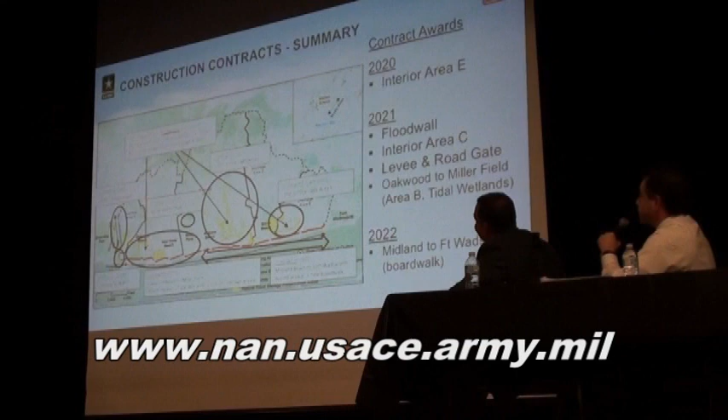All right, so kind of running all the way back, re-summarizing where we're at. The end of 2020, that's the interior area E at South Beach, the natural ponding area that will start. In 2021, you'll start to see the bulk of the contracts start: the flood wall around the treatment plant, the ponding areas in the New Creek area, the levee and road closure gate that runs along Great Kills Park and across Hylan Boulevard, and the Oakwood to Miller Field portion of the project, including the interior Oakwood ponding and the tidal wetlands. And then following in 2022 is the large portion of Midland to Fort Wadsworth, which will include the new boardwalk section.